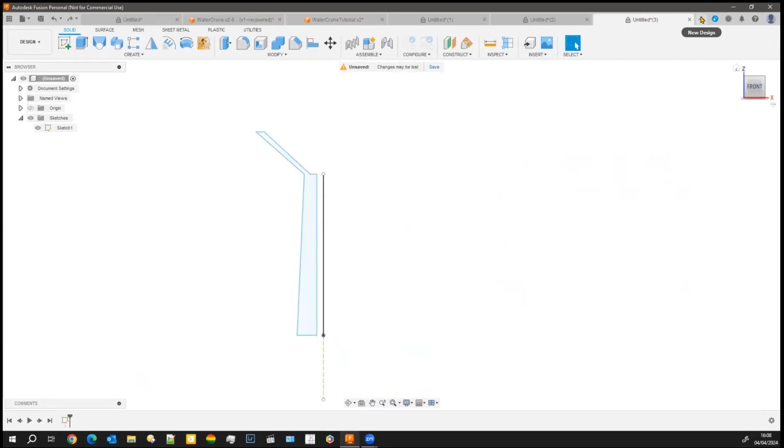So we have a new design and we want to get the chain. The chain's dead easy. We go into Insert, we go to Insert McMaster Parts there. We type in chain there. We then pick what sort of chain we want.

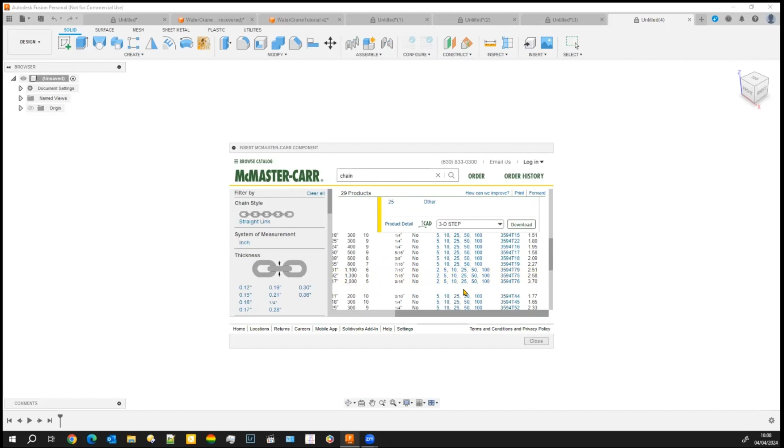I just want a standard chain, so I went for a light duty chain, and I chose a small one. Doesn't matter what size you have. Then when you come down, you got a choice of downloads. Now with Fusion, I use 3D step, download it, and there's the chain.

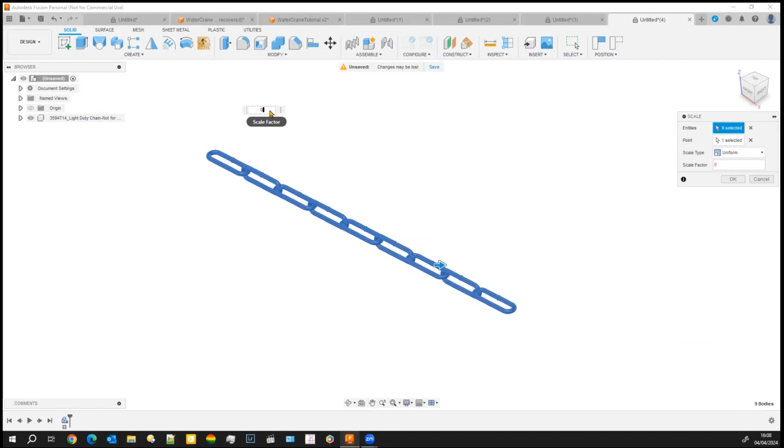Now I can move that chain around in my drawing. I can resize it if need be, highlight it, modify, scale, and alter the scale of it. So we'll make it twice as small, 0.5, and there it is, smaller.

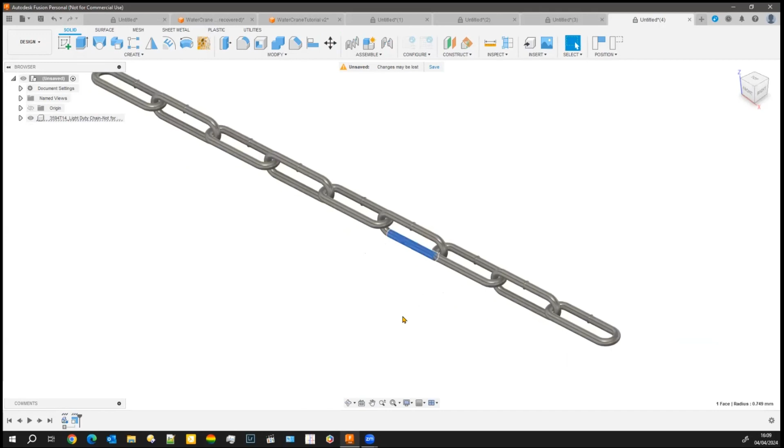If I want to make it longer, all I've got to do is copy, create a copy, and copy it, and I can just link it together. It's as simple as that. And you can edit this chain if you want to, take a link out, whatever.

Now I'm not sure how that would print, I've never tried it. I only put this in to show you the McMaster stuff. The beautiful part with McMaster, which is what I have done, and I have printed them,

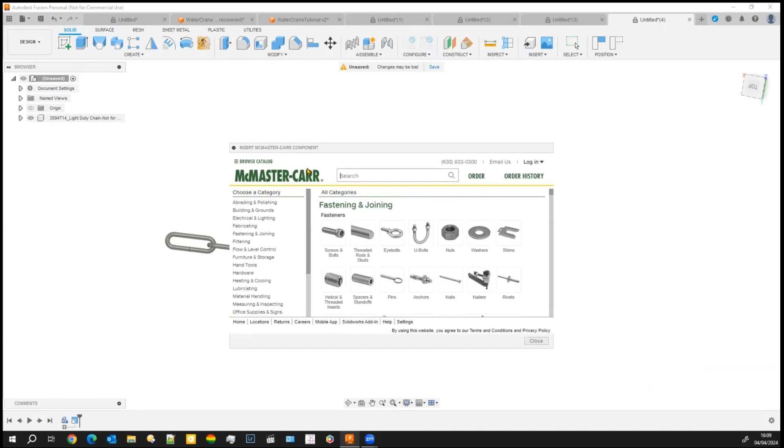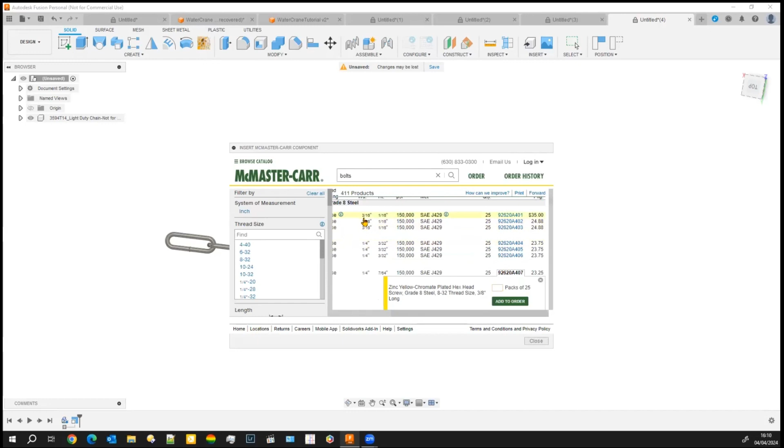is you can download a bolt. Say we'll just pick one at random. Where's it gone? Fully threaded one. And then 3D step download.

What is 3D step? 3D step is a file format that Fusion uses. Other programs use it as well. So there's our bolt there, look. Why draw it? It's there ready for you.

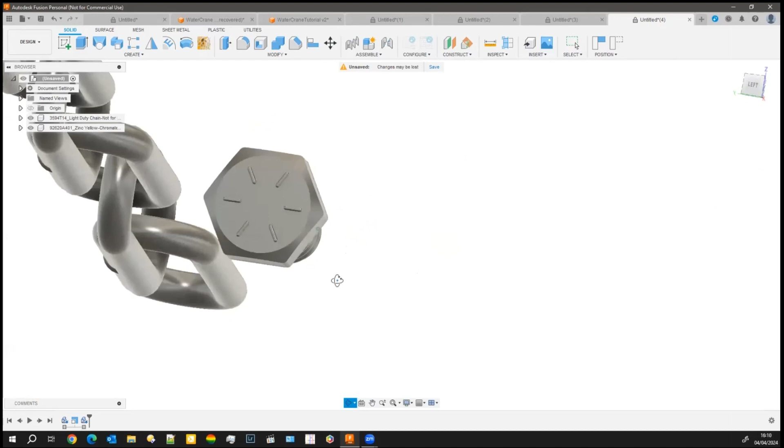There's all sorts of things on that site. I don't use the insert manufacturer part, that goes off to manufacturers' catalogs that are quite unreliable. But the McMaster one is very good. You can see you got a hole point, you got little grub screws you can use.

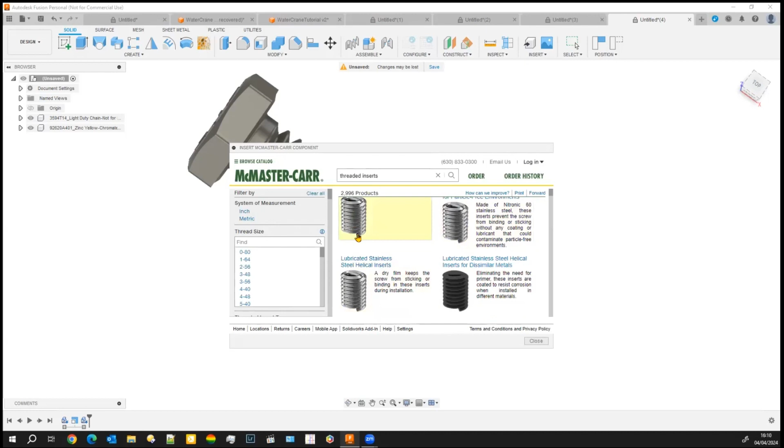Threaded inserts there too. Now I've used them in the past, not to print, but when I've been making things that I needed a threaded insert, it's handy to download the threaded insert, because then you've got the right size that you can then insert in your drawing.

Oops, where'd it go? I deleted it. There it is.

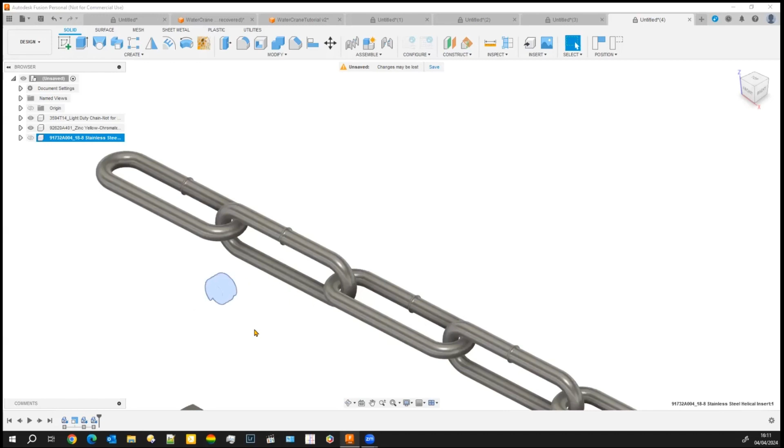So whilst I wouldn't print it, that's handy to put, if I'm making a box for example and I want little threaded inserts to screw the lid on, I can download them, put them in place, and actually see how the whole thing fits together.

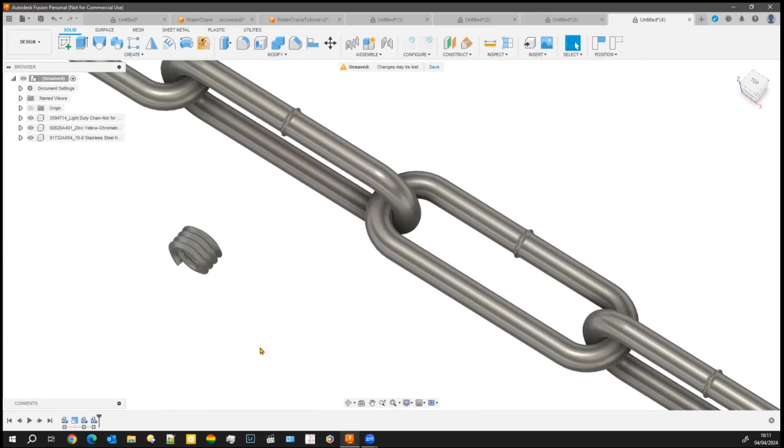That's a very good site for all sorts of hardware, but as I say, for threads in particular, washers, all those sort of things, because the beauty of Fusion, which certainly has the edge over anything else I've used, is that you can download these parts, build up proprietary and 3D parts together, and actually animate them to make sure they all work, check your clearances and so forth. For that, a catalogue of that nature is very useful.

Right, so I have a question about bolts and female threads. When you combine the two together, say you're doing a 1/4 inch bolt with a certain thread pattern and a 1/4 inch hole that's the same thing, when you actually build them, do you have to resize one slightly so there's room for it to screw in?

Yes, you do, and the amount of resizing will depend a lot on your printer if you're printing them. If I am producing holes, like if I'm producing, forget the threaded inserts, if I'm producing a hole in plastic that I want threaded, I will produce that hole to the tap size, and I will tap that hole out with a mechanical tap. I won't try and print it.

You can't print this small stuff, really. So therefore, if I was doing, say, a 3mm tapped hole, for example, and I was going to put a 3mm bolt in to hold a lid on, I would make the hole 2.8mm and then run a 3mm tap down it when it's all finished, and then that's okay.

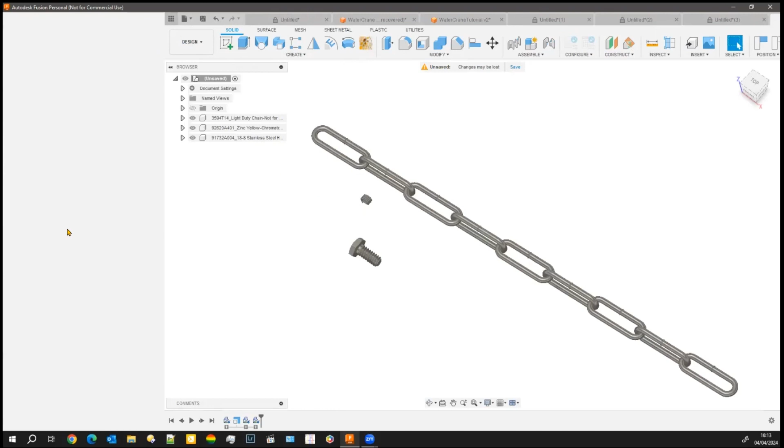But as I say, if you're doing what I've done, mass-produced PCB spacers, and then I bought a pile of brass threaded inserts and popped them in. I don't know, I think I only deleted one the other day from here to make a bit of room. There's not one on there now.

Okay Bill, thank you. And threaded rod or studs, if you want to do a stud, for example, you can just go on there, pick the size you want, whatever it happens to be, or let's just say that one for the sake of argument, download.

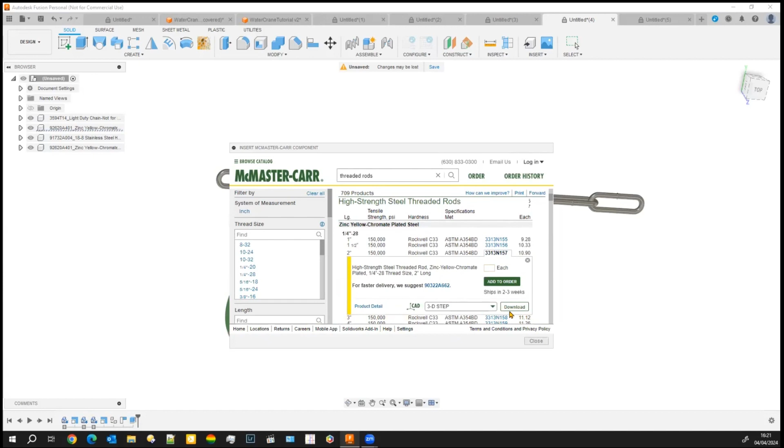And Fusion is 3D STEP, but there's other formats there as well. Download it, and it will come on there in a minute. Oh, it's gone black, which means it's gone on and goes slow. Probably a big bolt, that's why.

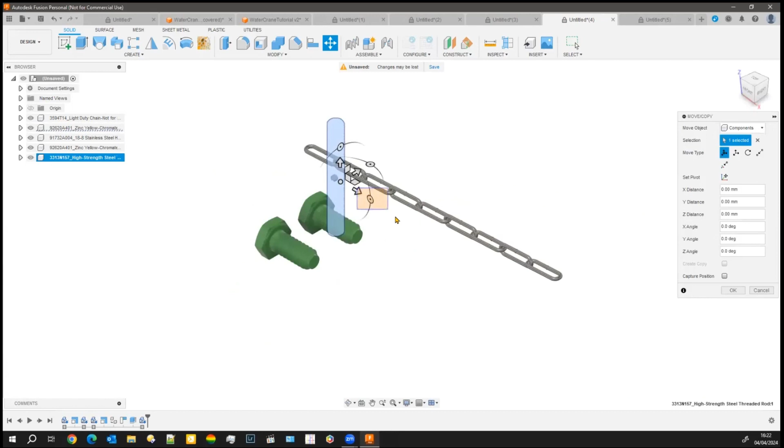But then you can alter it to suit yourself. So there it is in there. Look, we'll move it about to where we want it, and click OK. Now if we need to move it further, highlight it, we need it on an angle. Okay, have it on an angle.

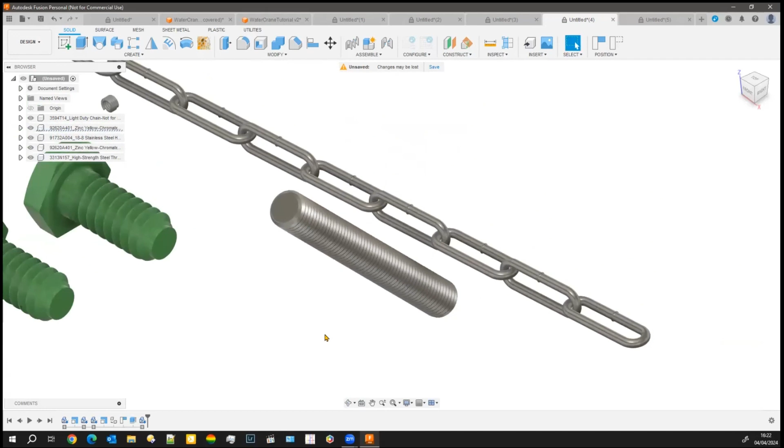So Russ, how do you extend the length of a threaded rod? You can't extend the length of it because when you highlight a face, you just extend that face. So the way I would do it, if you're doing it purely... hang on, let me get a shot of this blimmin' chain, it's driving me nuts.

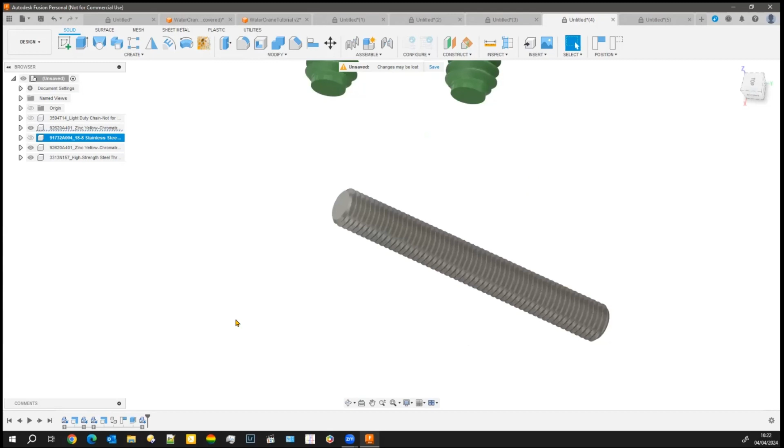If you're using it purely for modeling purposes, then the way I would do it is this. Let me just go back. Whoops. Redo, get rid of the chain. Okay, so I want to make that one longer.

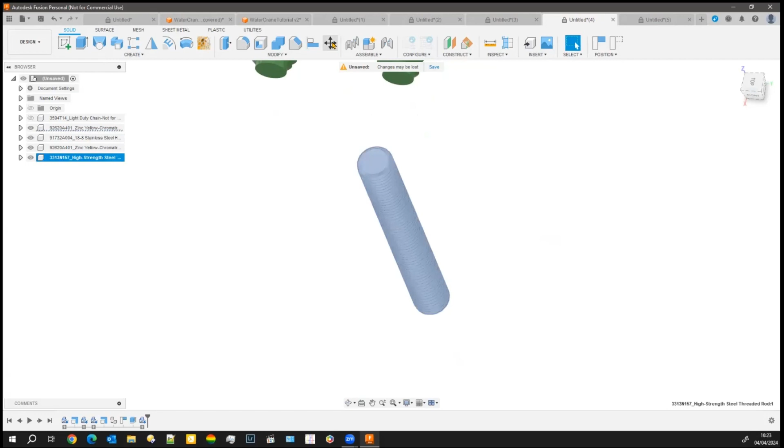What I would do, if it's for modeling purposes only, I would highlight it. Get out the way, highlight there. I would say create copy, and I would just drag another one down here like that. There I have my longer one.

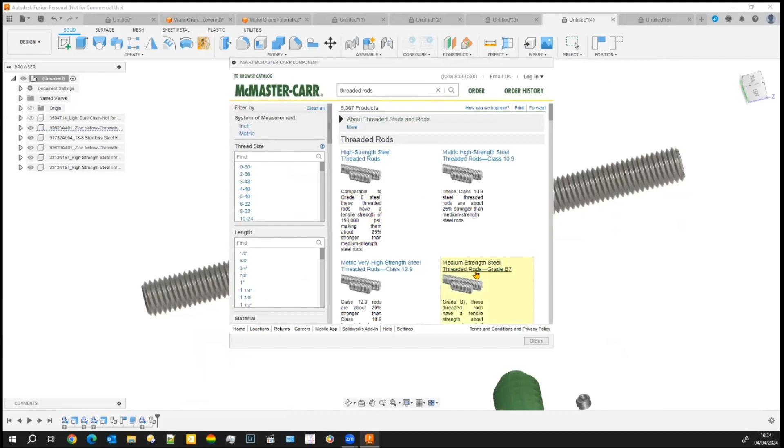And there's your diameters there. And there's your length, so you got a 1 foot section there. So the answer is to download a 1 foot section and then just chop off the bit you want.

Except you wouldn't have the taper on the end, would you? Yeah, you could put the taper on the end. That's an easy one to do with the chamfer tool. That's not a problem.